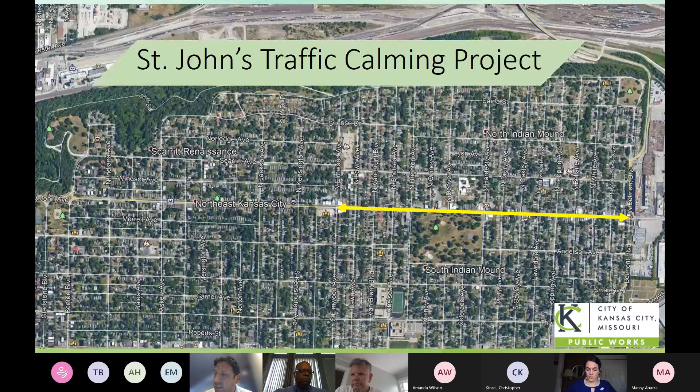With that behind us, and if there are any questions about the background of the project, I'm going to turn it over to Christopher Kinzel from HDR to begin to talk about the findings and recommendations of the project.

Very good. Can you hear me? Yes, give me a thumbs up if you can hear. Okay, let's see. Maggie, do I need to talk about these slides, or am I just going to share my screen? Yeah, I'm going to stop screen sharing and kick it over to you. Okay, so I will pull this up and make sure you can see my screen, Maggie. You're my test—yes? Get in there. Yep, yes, yep, okay.

Just a brief transition from our last meeting to this one. At our last meeting, we presented ideas for treatments on this corridor, in line with the allocated budget. If we did specialized treatments at intersections, like speed tables or speed humps—higher cost treatments—we'd only be able to focus on a few locations throughout the corridor.

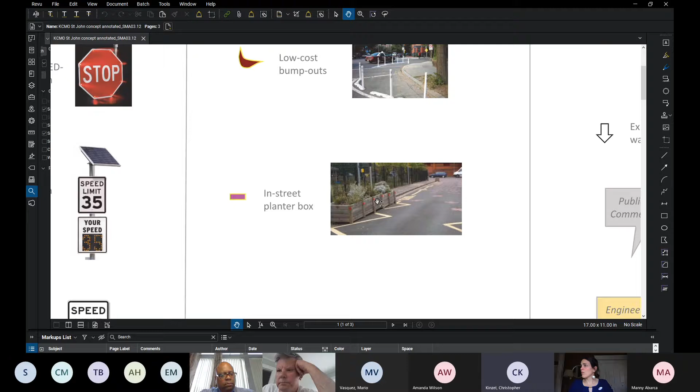There are a couple other places—pink isn't necessarily the color we've chosen—where we've shown some off-street vertical elements, like a planter in the street. In several places along the corridor, especially right in front of the park, there are already bump outs, but they're just curb bump outs without a vertical element. So we're suggesting adding vertical elements, such as small planter boxes, in those areas to reinforce those bump outs.

We're showing restriping of the whole corridor, and you'll see that in a second. That'll include high visibility crosswalks of the variety you're seeing here. And then there are a couple other features that I'll be pointing out.

One place where we're showing the LED-rimmed stop signs. There are some places with four-way stops and no flashing red lights or anything, so these are a cost-effective solution that will make those stops a little more visible. I'll show you where that is.

We're adding more speed limit signs throughout the corridor. And then also in a couple strategic spots along the corridor, we're recommending these solar powered signs that give you feedback on your speed. They flash if you're going above the speed limit. I'm sure people are generally familiar with those.

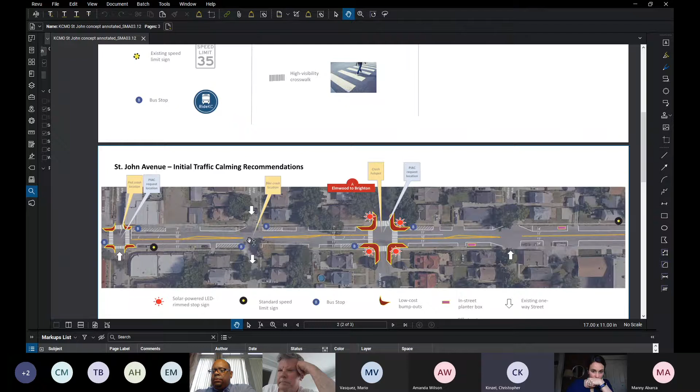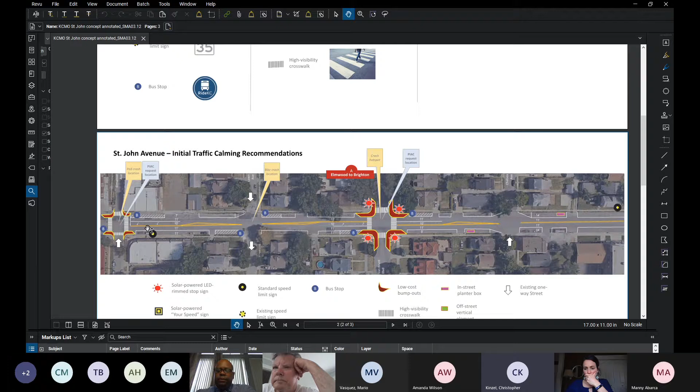I'm going to jump right in, and I'll zoom in on various spots so we can roll down the corridor. This section here is from Elmwood to Brighton. We're going to start at the west end of the corridor and move east, so that'll be left to right on your screen.

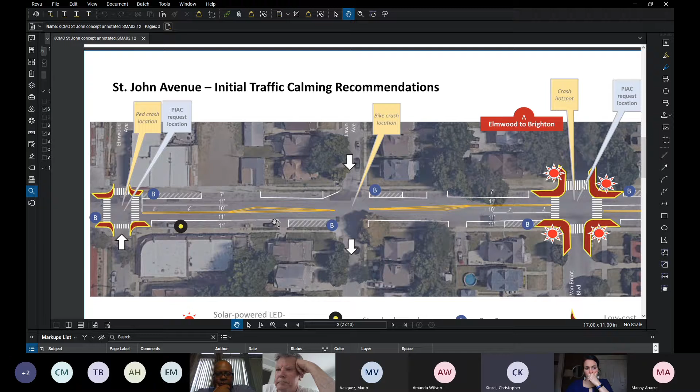These little arrows show where there's one-way streets. The blue Bs show where there are bus stops. Some of these dimensions show proposed widths of lanes, and you can see we've got proposed striping. And then we have these little balloons here that show some information, like this.

The intersection of Elmwood was the subject of the PIAC request, one of the intersections talked about in the request, so we're just highlighting the specific locations. Again, we've sort of expanded beyond that based on the feedback we got.

Then there's some other findings that we wanted to point out, like here at Elmwood, this is a pedestrian crash location. So again, we're showing bump outs on all 4 corners, a high visibility crosswalk. This is a signalized intersection, but this will also make the pedestrian crossing distances shorter, and again, when the light is green, it will help cut down on the speeding.

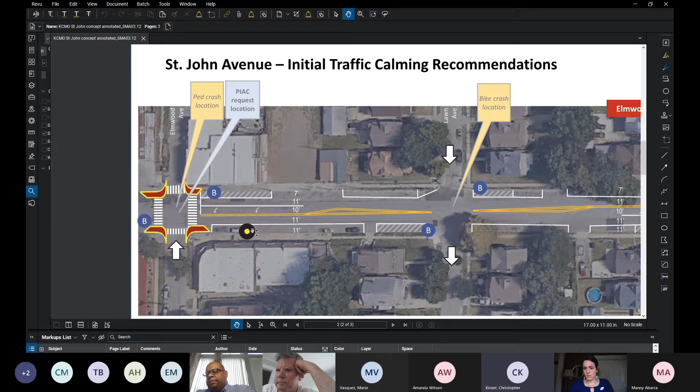We're also showing here a speed limit sign. You'll see here throughout, we're kind of reserving some bus pullout areas. And in general, we're narrowing the lanes of the street with striping, trying to narrow them down to 11 feet, which is really the narrowest we can get them, because KCATA runs buses down this corridor, and 11 feet is the narrowest that makes sense.

So what we've done is kept the through lanes at 11 feet, narrowed, which is narrower than what's out there today, narrowed the turn lanes to 10 feet, and then taken up the rest with parking that's striped out and delineated. In some of these parking zones, as I mentioned, there are planter boxes proposed and things, so that really we're trying to reinforce this narrower width of the road.

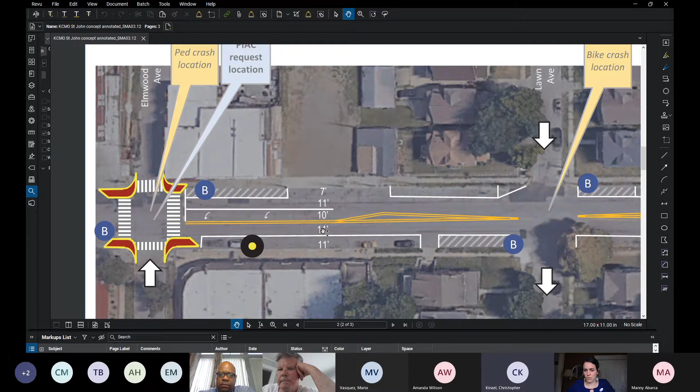You can see through here, the parking width kind of varies so that we can keep, because the street width varies, this helps us keep the paved width of delineated lanes straight, or narrow. But we're continuing to provide parking all along the street where it is today.

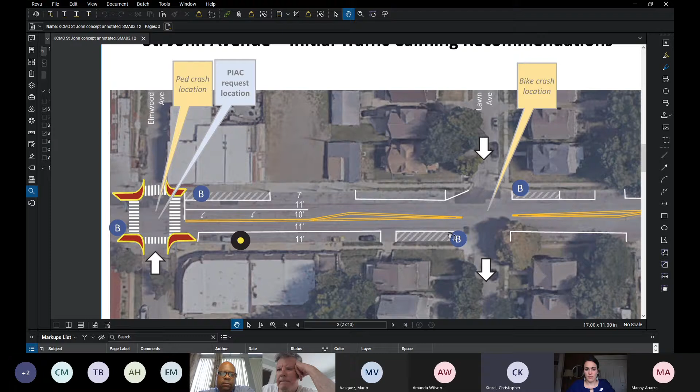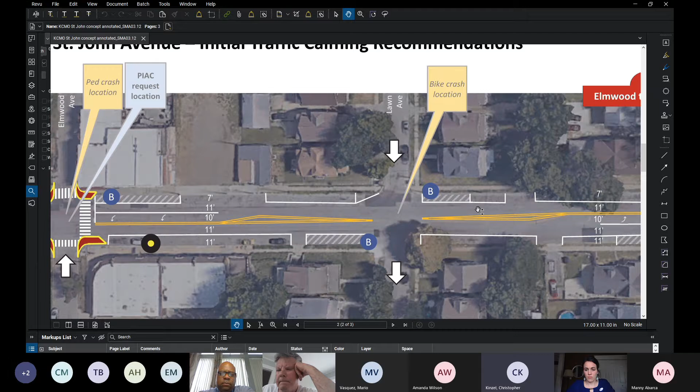In the bus zones, we're striping those out so that the buses can make their stops. We are coordinating with KCATA - they're going through their system right now, so we'll make sure that if they make any changes, we're reflecting those changes.

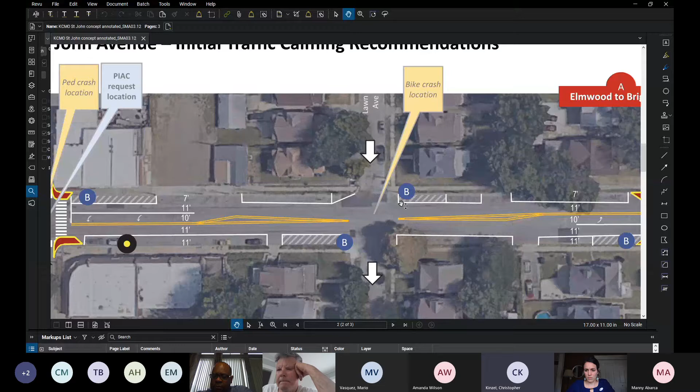Moving down to Lawn here, this was a bike crash location. So again, by keeping this narrow, we're promoting lower speeds. We'll also be better promoting bike travel if cyclists want to continue to use the street.

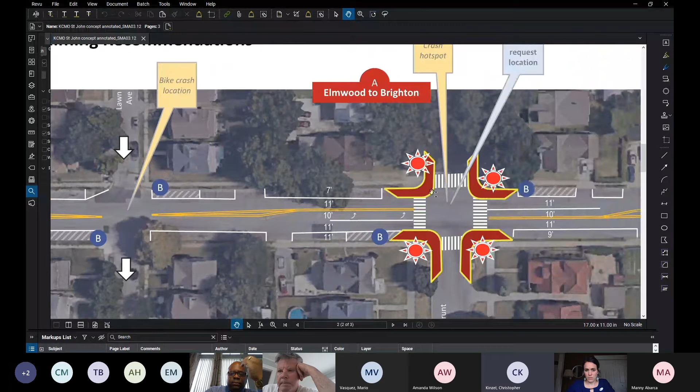And then moving down to Elmwood, we're showing the bump outs and the crosswalk - I'm sorry, this is Van Brunt, excuse me. Van Brunt is really the widest street, being a boulevard, it's the widest street along the corridor in terms of cross streets.

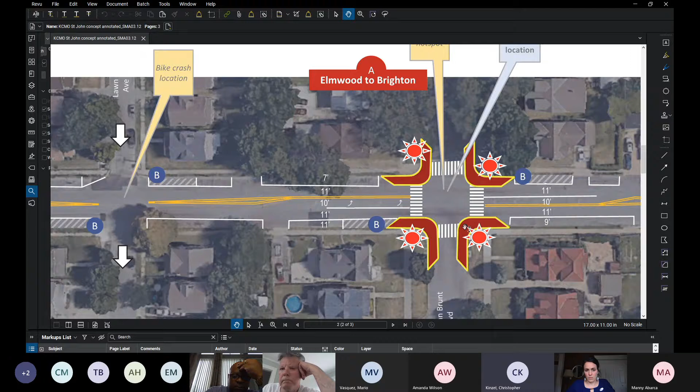So we need a little more, we'll be able to bump out a little bit more and really provide some narrowing benefits here. This is the four-way stop, and this is where we're showing those solar flashing stop signs. They're ringed around the edge with flashing red lights that are solar powered. This is a location where there have been more crashes along the corridor.

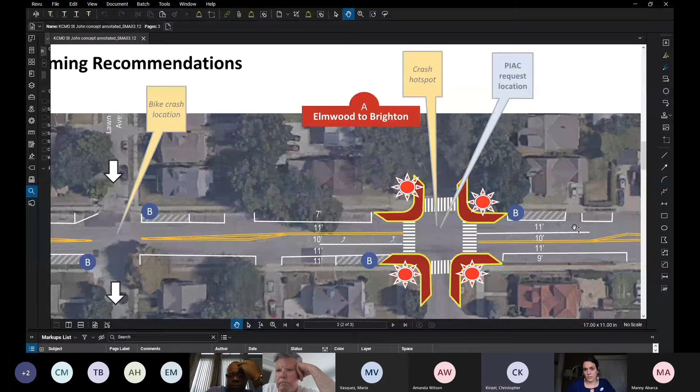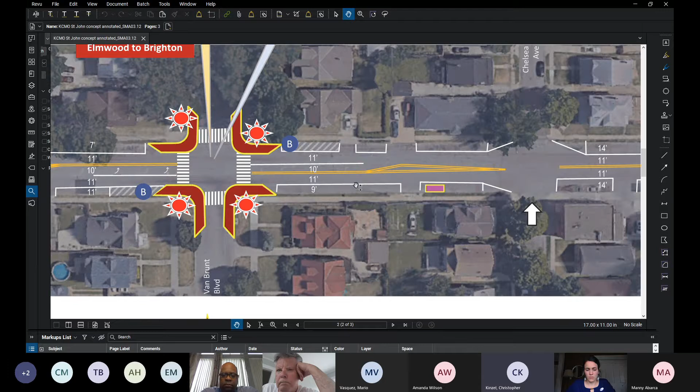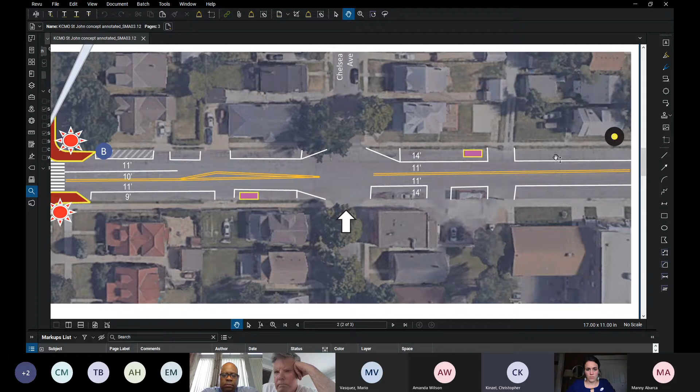And this is here, just as we get east of Van Brunt, our first location where we're showing a planter box, so we're trying to intersperse those between these bump outs. Here's one on the south side of the street, here's one on the north side of the street. That reinforces those parking areas and those narrower travel lanes. And then a speed limit sign here as we get to the end of this little tile.

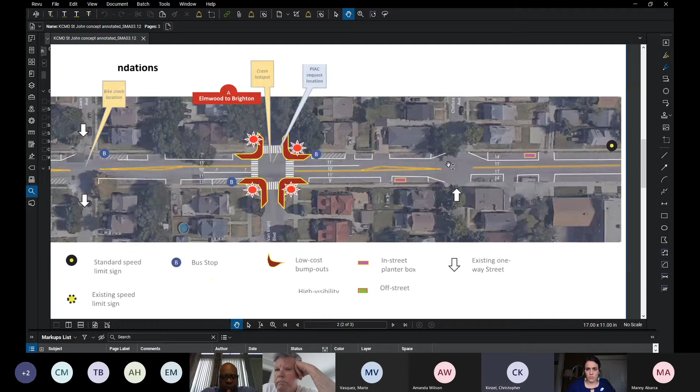So I'm going to walk through 3 more of these this way, but I guess, Maggie, did you want to see if there are any questions at this time? Yeah, so we've got a few general questions that I think we'll wait till the end to address, but it does look like we've got a couple specific questions about this section.

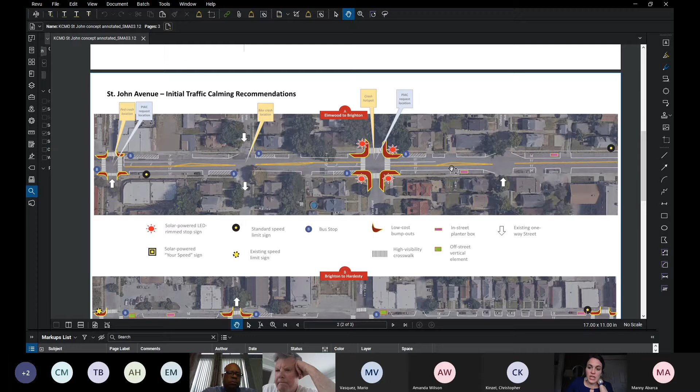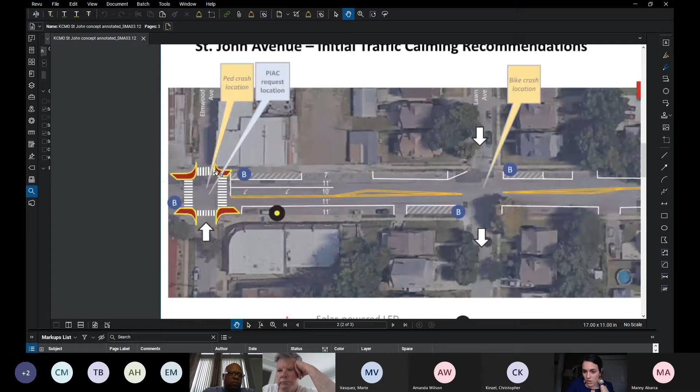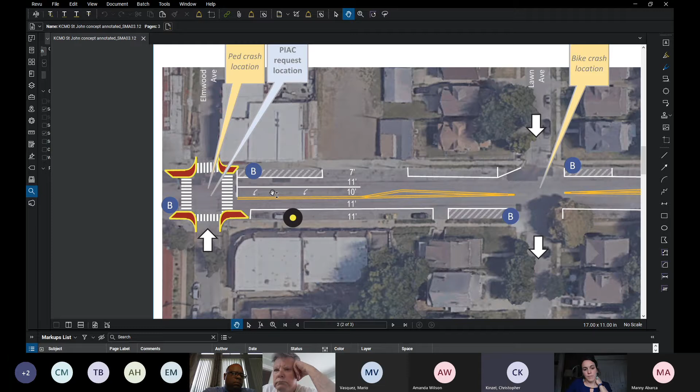So Amanda in the chat is asking about the intersection of St. John and Elmwood, wanting to make sure that the left turn arrow is pointing the right direction with the one-way on Elmwood. I think it might just be an error on the arrows here where we're showing the left turn lane into... Yes, you're correct. This concept needs a slight revision here because there should be no left turns onto Elmwood. You're correct.

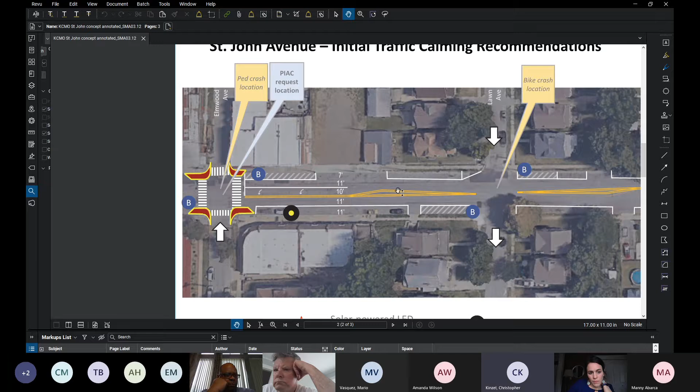So we'll make that correction. And then how would that change the configuration there of the lane? We would probably stripe out the center and just show it as a double yellow, so it would take up the same width.

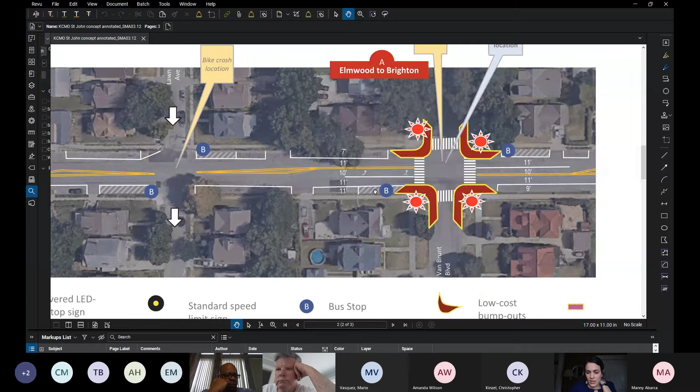And then on the other end of this tile back at Van Brunt, Amanda wants to confirm how many actual lanes are at Van Brunt. On Van Brunt, there will be 1 lane in each direction, like there is today, and it kind of narrows down, but we're necking it down there. And then on St. John, there will be 1 through lane in each direction, and then a left turn lane, like there is today.

It does look like someone has their hand raised for this section, I believe it's Scott. If you do have a question about this particular section before we move on, feel free to raise your hand or type your question in the chat. Again, all general questions, we'll have plenty of time for additional questions when we get to the end, but if you had something specific to this particular section, we can address that now.

So Scott, if you'd like to unmute yourself. Yeah, thanks, and I apologize, I'm on my phone and I can't access the chat. The question is on Van Brunt: since that is a boulevard, has the team talked to the Parks Department related to the treatment there, just to be sure that they're aware and have either blessed it or made some commentary toward it?

Thanks. Hi Scott, this is Mario. Yes, we have shared these concepts with the Parks Department staff, and as of right now we haven't received an approval, but they are aware of the items that are being proposed. We'll expect to continue to have discussions with them as we try to advance the project forward. Okay, well, I have Park Board Tuesday, so I'm happy to relay the message. Okay, that sounds great, thank you.

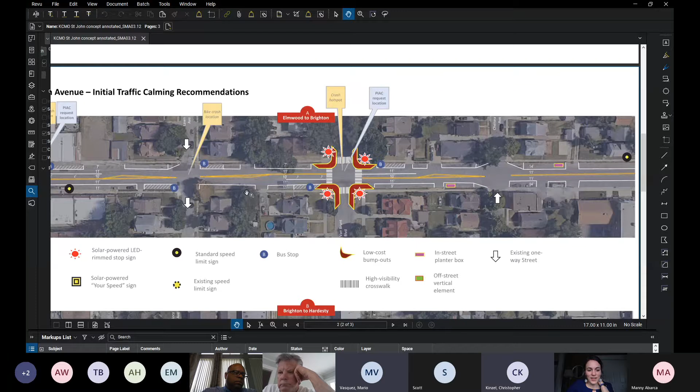Are there any other questions or thoughts about this initial section from Elmwood to Brighton?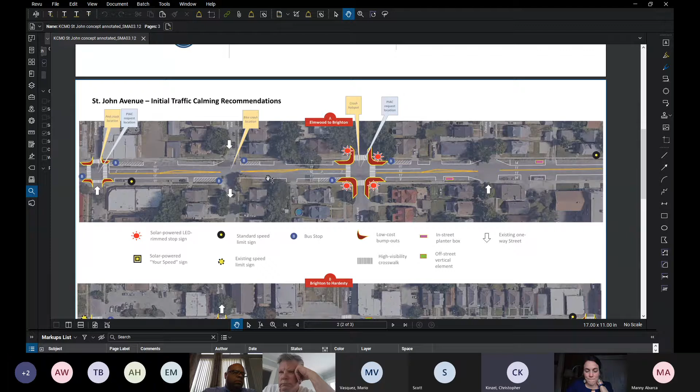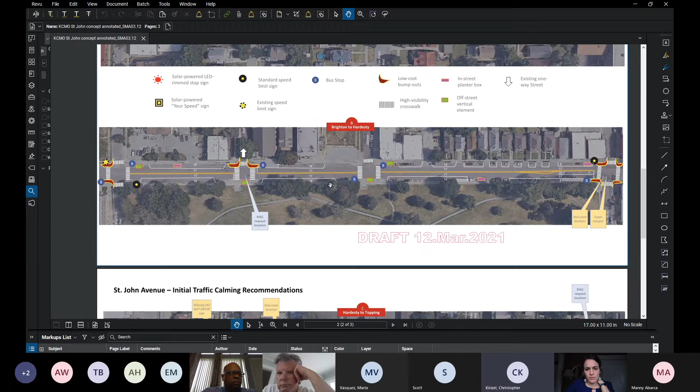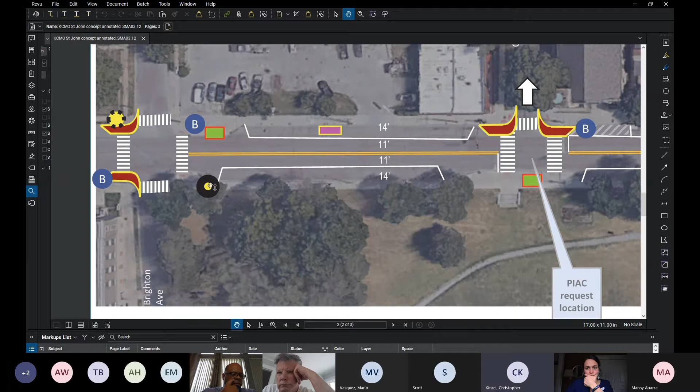So this is in front of the park, as you can see. If I zoom in on Brighton, this is a symbol for an existing speed limit sign that's out there. We're also showing a new speed limit sign in the other direction. Again, we're showing speed limits every quarter mile or so to keep people remembering these things.

You'll see through the park here, these green boxes are where we would put on the existing bump outs to help give them a little bit more verticality. We're showing a few of those here. Obviously, we have to be careful in the design to make sure we're not obscuring sight distance around the corners and things like that. But having something on those bump outs gives the driver a little bit more of what we call an optical narrowing feeling, which just makes the road feel narrower.

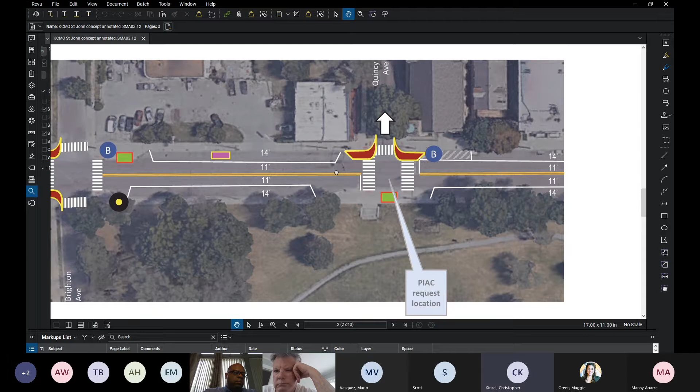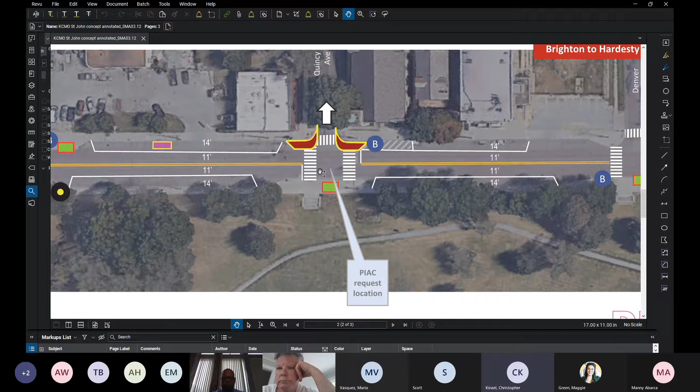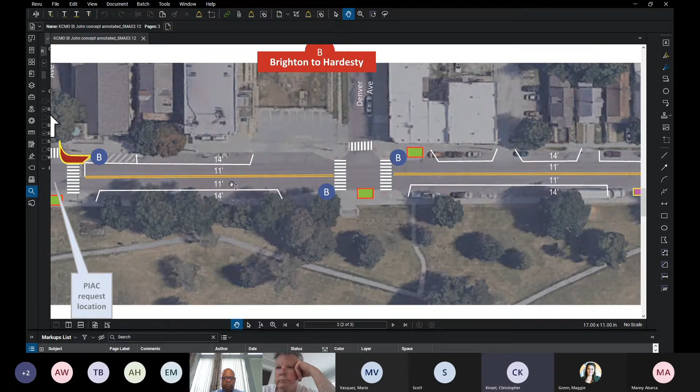We also have a planter box here strategically in the parking area. At Quincy, we are showing bump outs on the two corners. There's already a bump out on the south side, it's a T intersection, but then also a vertical element there to continue reinforcing that optical narrowing. Sorry to use a geeky term. We're doing the same thing down at Denver, keeping these 11-foot lanes, varying the parking width as needed to keep the lanes narrow.

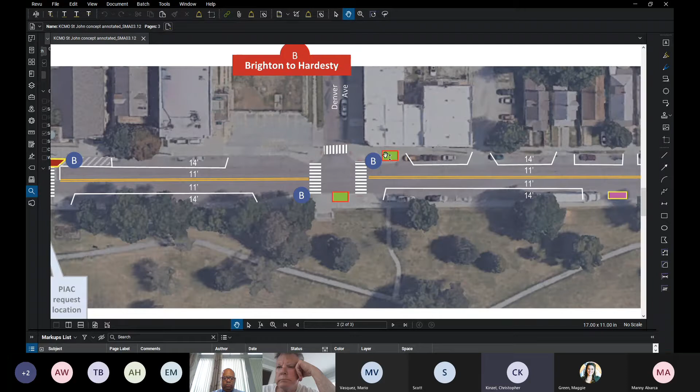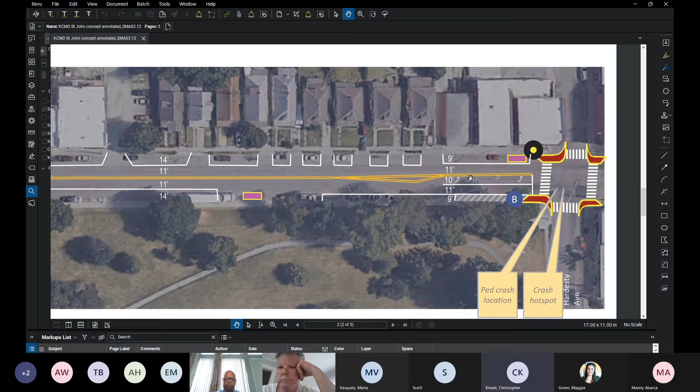Crosswalk at Denver, some of these vertical elements on the existing bump outs. As we move further down from Denver, we're showing a planter box on each side, trying to strategically locate them so they're not blocking key high demand parking areas. And then we get to Hardesty, which is an area that people have been really concerned about.

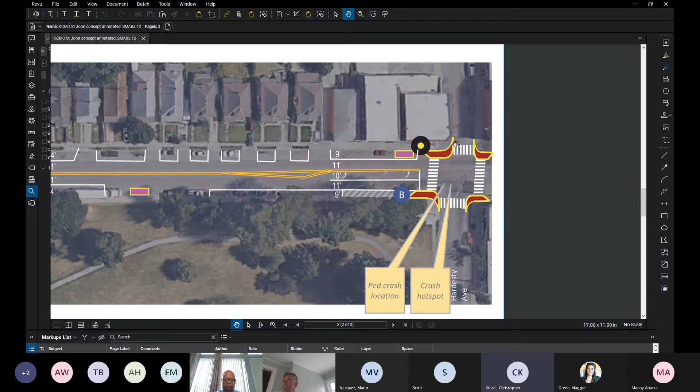It's sort of the top of the hill, especially heading eastbound, you start to go down the hill. So on the next tile, you'll see we've done a special treatment to continue discouraging people from speeding down the hill. We're showing a speed limit sign for the eastbound direction, a planter box right near the intersection, and then bump outs and high visibility crosswalks there at Hardesty. As we head down the hill, there are some additional treatments, but that's on the next tile.

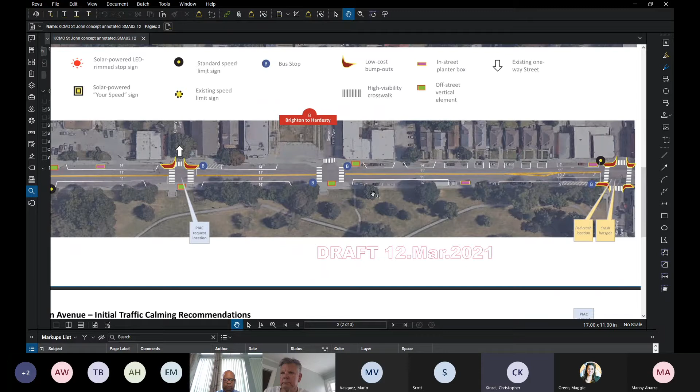I think specific to this section, Abby Hoover is asking about if the crosswalks are going to be raised, or will there be any signs or flashing lights for them by Holy Cross?

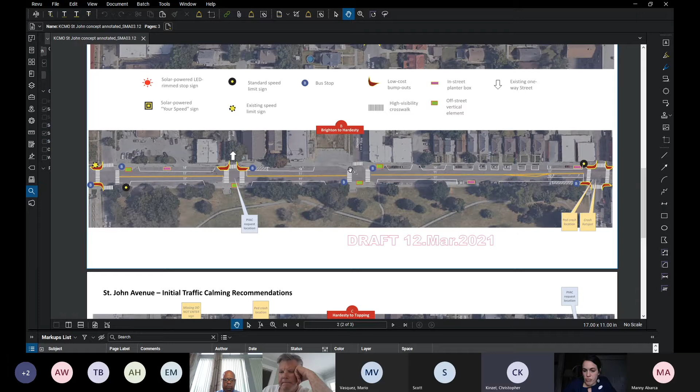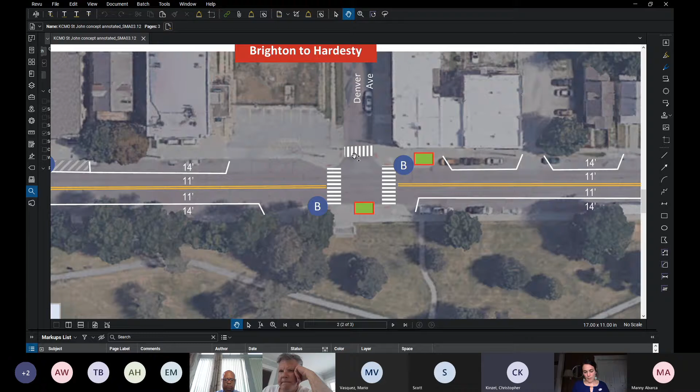At the moment, our plan is not to raise them, that's how we're spreading the treatments out. We're not showing raised crosswalks here because of the expense in these locations, but they will be high visibility painted crosswalks. No additional flashing lights are proposed at this time.

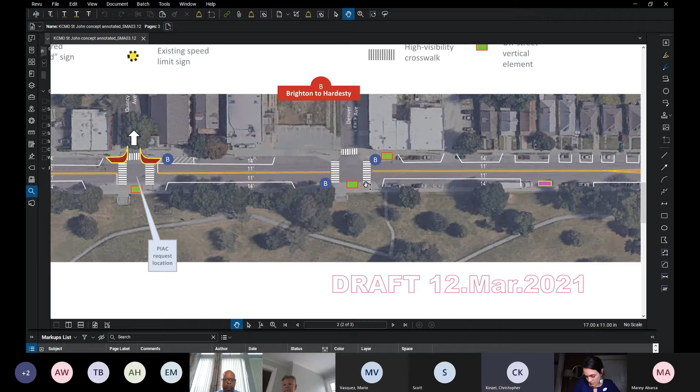Well, just to clarify that a little bit, this is Mario Vasquez speaking. When we're talking about flashing lights, we're thinking that we're not going to provide things like an overhead or mast arm type signalization, but each crosswalk will be appropriately marked per MUTCD guidelines. So there will be signage to indicate the crosswalk, but not any of what we call hawk signals, the ones that flash in the middle of the intersection. Those are rather pricey, so we don't think those will be necessary, but we'll for sure have the appropriate signage for the intersections.

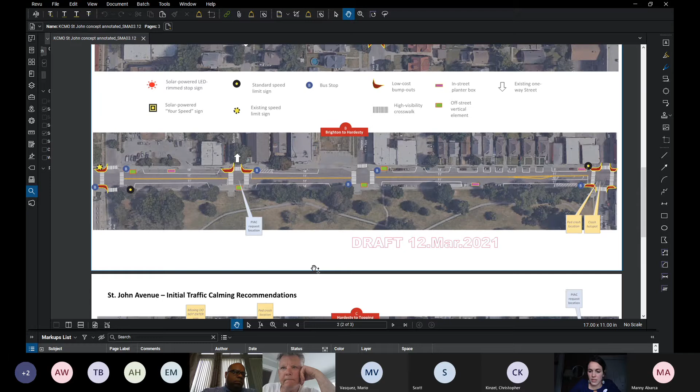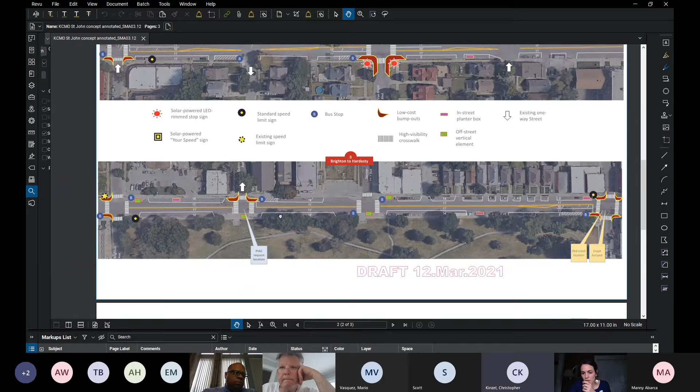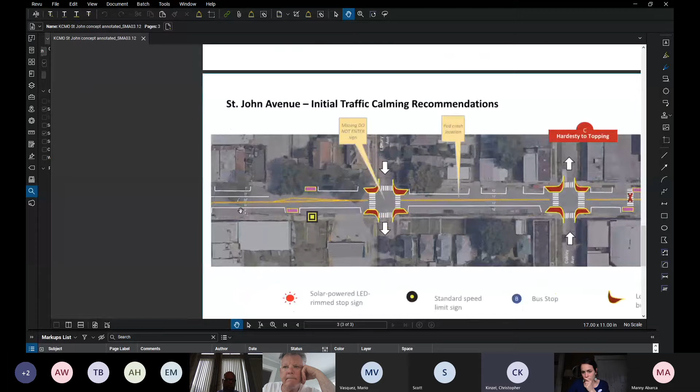Okay, so as we continue down, this section is from Hardesty to Topping. As we head down the hill from Hardesty, as things start to pick up, we're showing one of the flashing your speed signs to not only give people the speed limit, but to flash back at them what speed they're traveling at, which is a pretty effective method for getting people to slow down. We've also got planter boxes here to narrow the street again down to those 11-foot lanes, and on the sides of the streets to reinforce those narrower lanes.

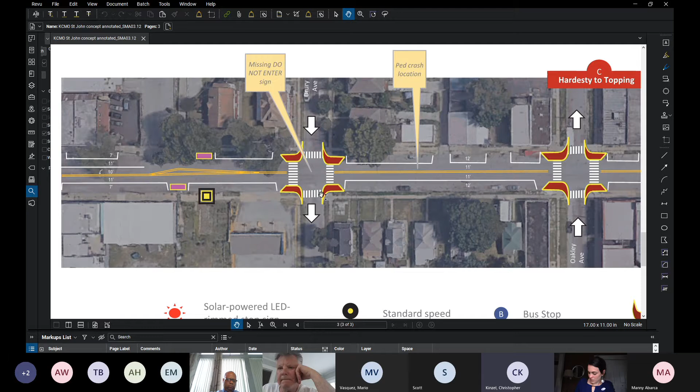As we get to Drury, we're showing again the bump outs to narrow the street, and then the crosswalks, as Mario mentioned, with appropriate signing. Then the same thing as we get down to Oakley. Now there is an existing crossing on Oakley in front of the church.

Our proposal here is to really keep this section slow. We've now got bump outs at two adjacent intersections, and our proposal would be that people would cross the corner here, so instead of having a mid-block crossing, we have an intersection crossing. This is in front of the church area, and on the other side we're providing planter boxes to continue to narrow the street.

As we go down past Lawndale, we've got another planter box, and then when we get to Topping, we're showing bump outs there, and also crosswalks and a speed limit sign.

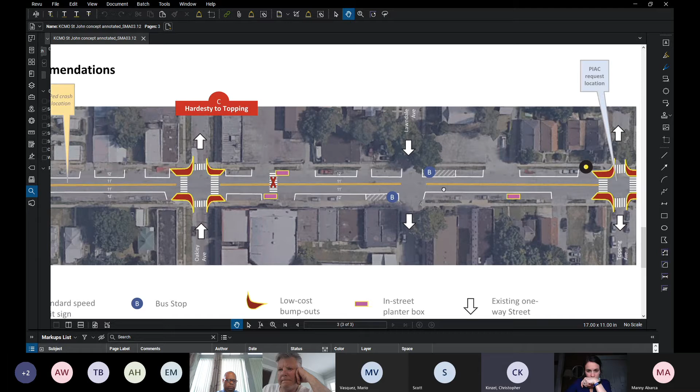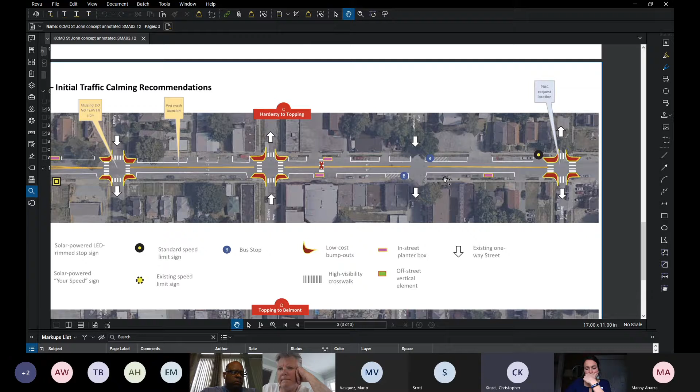I think the other electronic speed limit sign will be on the last section, where it's a little bit flatter. Here, going east, you're going downhill from Hardesty. Going west, it's uphill, so we've tried to position that speed limit sign on a flatter spot where it might control speeds a little bit better in the westbound direction. So that is the third section.

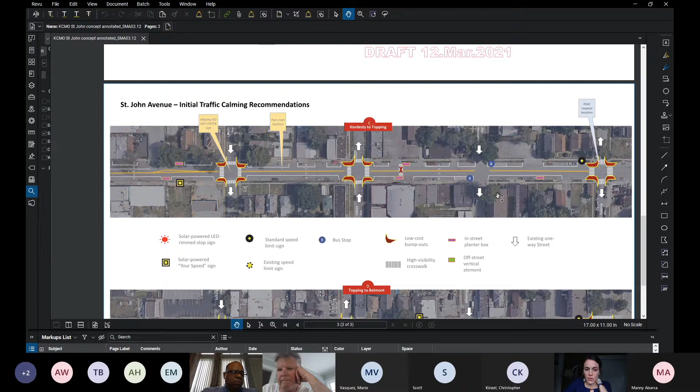Maggie, any questions on this one? I am acknowledging several that are coming in that are a little more general, so I am going to try to wait for those till the end. Anything specific about this section that Christopher just covered, or any additional clarification needed? Scott, I see your hand raised.

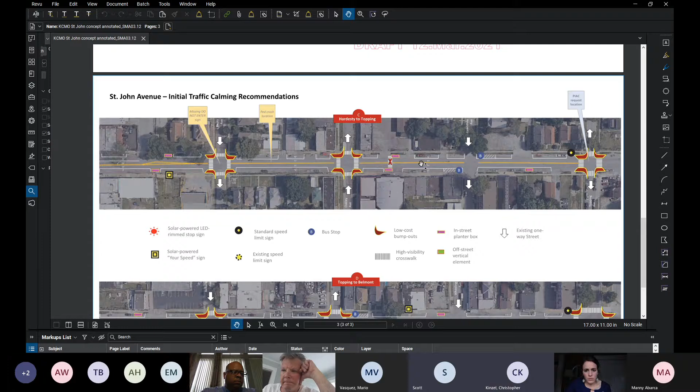Go ahead. That mid-block crosswalk is for Calvary Church. Yes, and that is primarily because across the street is also their parking lot and a couple of their buildings.

So I raise that just to ask if there has been that conversation with Pastor Wendell over there. I think he's on the distribution list for all of this, but I just want to raise that's why it's there, and that a conversation with the church is probably warranted to deal with that issue. I'll mute myself. Thanks.

Maggie or Mario can respond. I'm not aware of conversations with the pastor, but maybe Maggie or Mario are. Yeah, I think that's a great point, and something we can definitely reach out about before we propose that change, because I think they probably utilize that crossing more often and frequently than the actual intersection. So definitely wrote that down to do a follow-up directly with them.

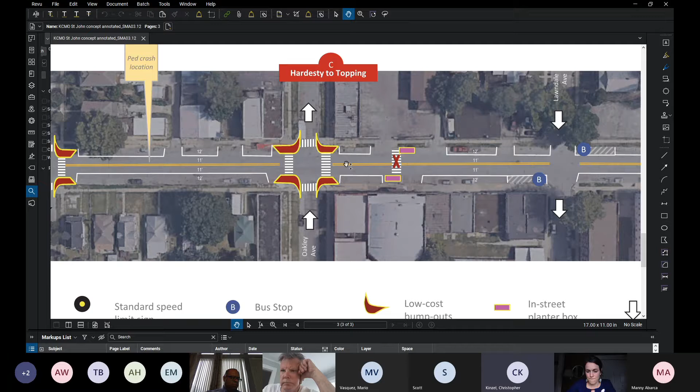Thanks. I think the hope was, and we could certainly have that follow-up, we're looking at this because it's a little bit out of the way for a pedestrian to make that crossing, but not hugely out of the way. So we were hoping that consolidating at the intersection helps make the intersection safer and gives them a safer place to cross where they might be more expected. But it's certainly a conversation worth having.

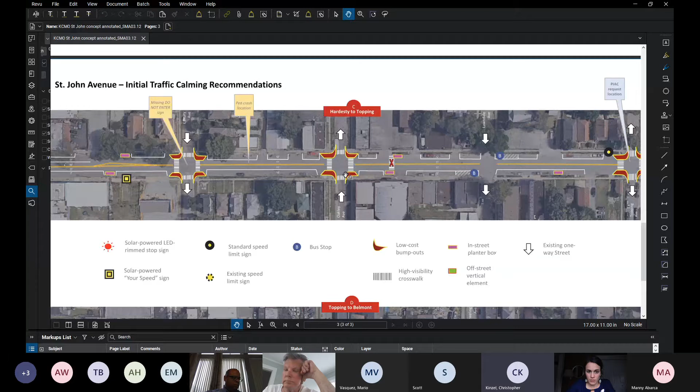So, Maggie, any other comments on this section? Not so far. So let's do the last section and then circle back to more general questions. There was a question about the speed limit. I'm not sure if the speed limit will change by the school, or if it'll remain the same. At this time, we're not proposing any changes to speed limits, but the speed limit at the school should still be 25 miles an hour.

What we intend to do is a post-installation evaluation to make sure these treatments are being effective. Our goal is really to bring the observed speeds to roughly around 30 miles an hour, so that's an appropriate speed limit. Thanks, Mario.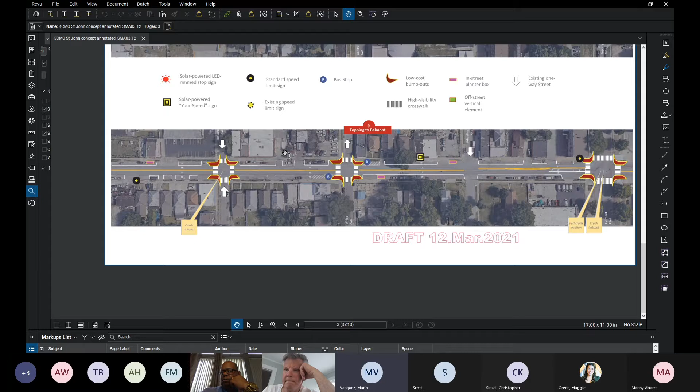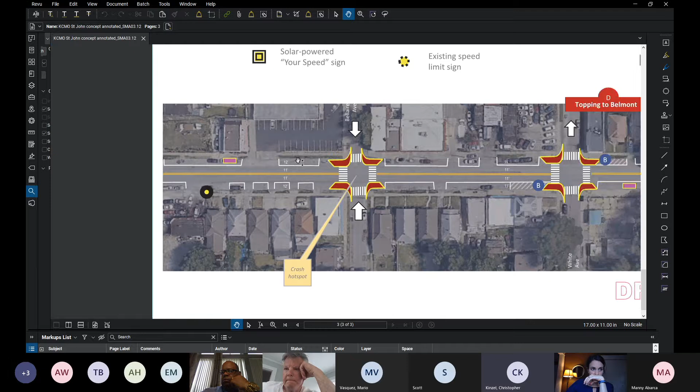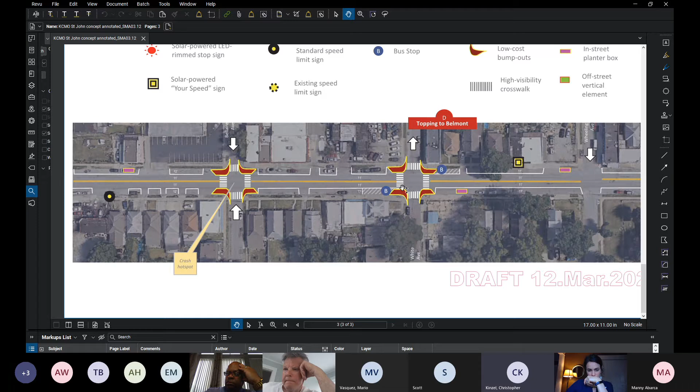So this last section is Topping to Belmont. At the beginning of the section, eastbound, we've got a speed limit sign. Westbound, we've got a planter box carrying the theme through here. And then at Bellaire, we're showing bulb outs, and also at White. It's a question of trying to figure out where you can put these things and where they'll work, and how you can balance them with the planter boxes.

So in this case they end up close to each other, which is not necessarily a bad thing. We have two narrowed intersections, White and Bellaire, which are also narrowed. And then as you get past White, this is where we have in the westbound direction the flashing speed sign.

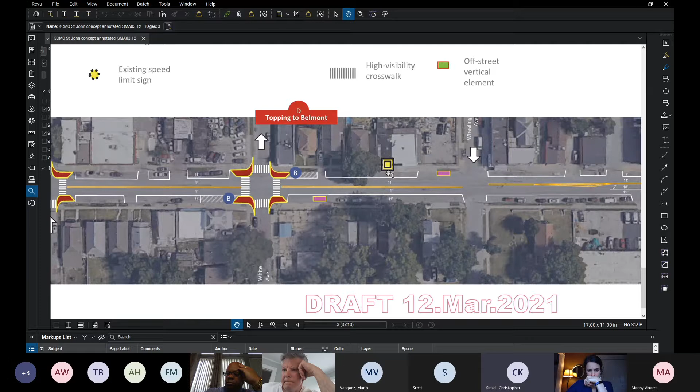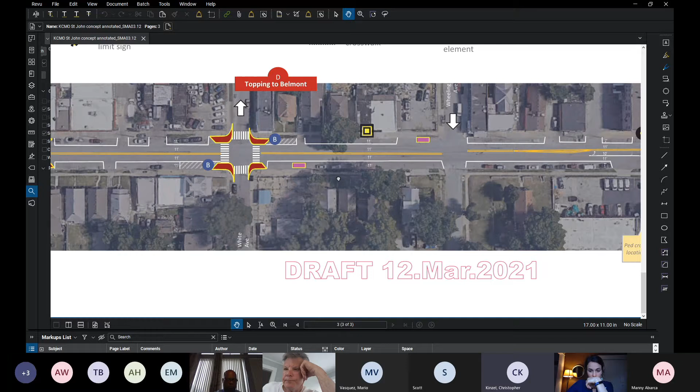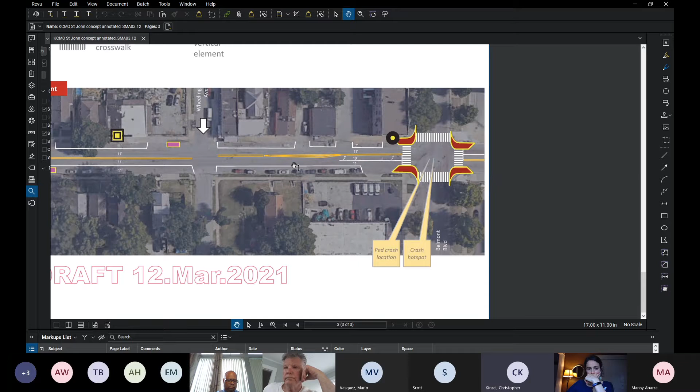So it's kind of as you're entering the area that you see this flashing speed sign. And then we have some more planter boxes between White and Wheeling, and then from Wheeling to Belmont. At Belmont, we have the bulb outs and crosswalks, and then a speed limit sign at the beginning of this section to again reinforce to folks the speeds through this area.

So as you can see, it's a fairly consistent pattern of bulb outs, narrowing, striping, and planter boxes to really narrow the street, give folks the perception of a narrow street.

This is something that cities across the country are using, these kind of low-cost treatments that can really be spread across a corridor. And Mario can attest the city's been using this as well, and it is a really good way to spread dollars and provide those benefits.

So, any questions, Maggie, on this last section?

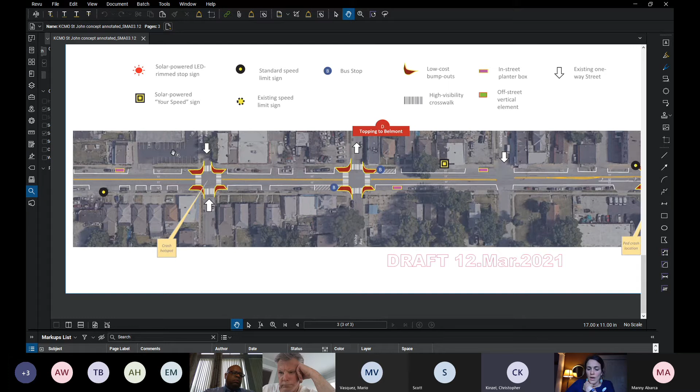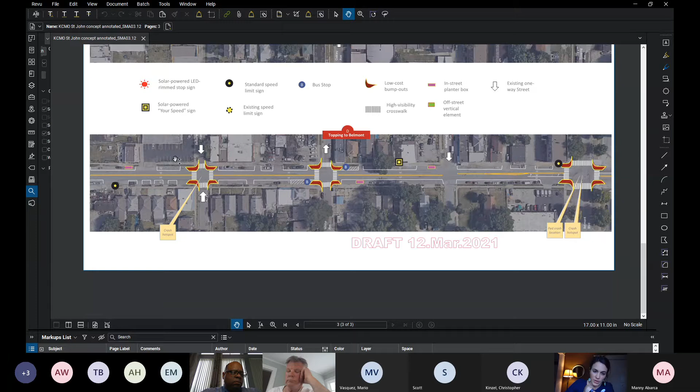One question that came through: what about planter boxes directly in front of some of the businesses, like the ice cream shop and taco places? So, Christopher, I don't know if there's a direct translation in outreach and where the planter boxes are placed along the corridor, or what criteria you use to decide where they go along the corridor.

Yeah, that's a great question, and keep in mind this is a concept for folks listening, so when we get into design, the actual locations could shift a little bit. We were pretty strategic, and the first criteria in placing the planter box was, if there's a parking lot right next to it, so on-street parking may not be as much at a premium.

Or typically we tried to place it at locations where either there's already a lot of parking available along that section of street, so having the planter boxes there would not be an issue.

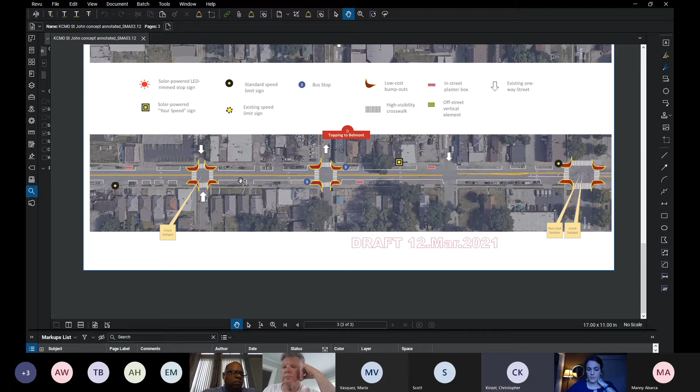Those are really the two big things: where there's adjacent off-street parking, or where there's a lot of on-street parking, so that we're not taking away, as a percentage, a large piece of the parking. We did look pretty carefully at those locations and tried to be strategic about it.

But that's why we're having this conversation as well. We certainly welcome folks' input and feedback on this.

I do want to reiterate for everybody that at our first public meeting in December, we did hear loud and clear from folks at that meeting and some subsequent meetings the emphasis on spreading out the funding more corridor-wide, instead of doing less treatments or improvements at fewer locations.

So we did work with the design team, and thanks to HDR for running with that concept, so that we can make sure we're using the funding as far and at as many locations as possible. I just wanted to reemphasize that the feedback was very helpful at the last meeting in informing the direction we headed here.

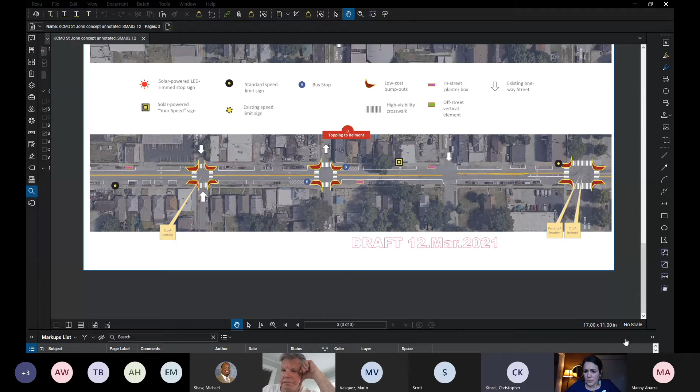So with that, I don't know, Mario, do you have any high level thoughts before we dive into some of the questions? Yeah, I think the key thing is, again...

There's a couple of questions about the cost of the project and what it takes. In reality, $500,000 over 1 mile sounds like a lot, but it doesn't go too far.

So I think what we have tried to do here is come up with ideas that can be implemented throughout, so that, as Chris mentioned earlier in the meeting, the benefit can be felt throughout, so that we can see an improvement to traffic safety along the corridor.

I think we definitely want to continue to work with the neighborhood to come up with a way to implement improvements long term. And this goes back to some of the questions about coordinating with resurfacing, and at what point these cease to be low-cost treatments and become more permanent treatments.

That's part of the discussion that we need to have with the neighborhood long term. But I think our initial run at this is to implement something that can be low cost and implemented throughout the neighborhood. Trying to think what other thoughts are out there. So I guess that's kind of summarizing what Chris has shown to you today.

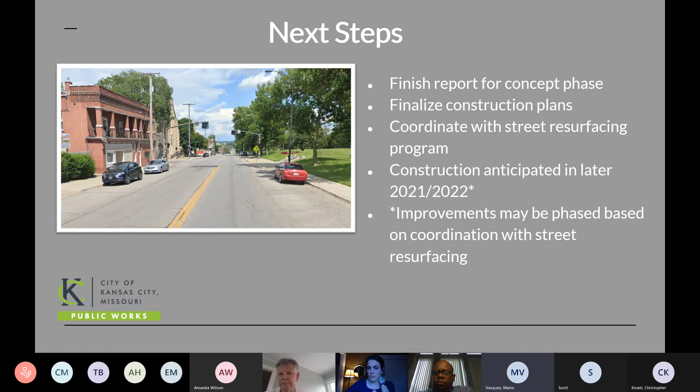And last but not least, there's some things that we may hold back a little bit before we're fully implementing. For example, Chris, do you mind sharing your maps real quick? I want to make a distinction between the types of pavement markings. Sure, hold on. Let me get back to that.

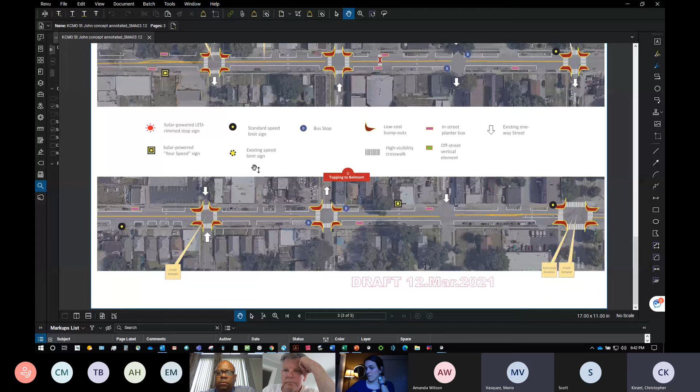Yes, just zoom in on any of the panels and that'll be okay. So if you can appreciate in this panel, you can see some markings that are long and linear. Those long markings are probably the double yellow, for example. Those are ones that I would maybe hold off on, because those are better done with better asphalt or a newer, better surface. But the crosswalks, what I would call the short markings, those would probably be the ones I would want to implement immediately, because I think those are the ones we really need to improve the project and improve the corridor. So when we talk about long-term versus short-term improvements, I think that's what we mean. We'll do the short markings immediately, but maybe hold off on the long markings.

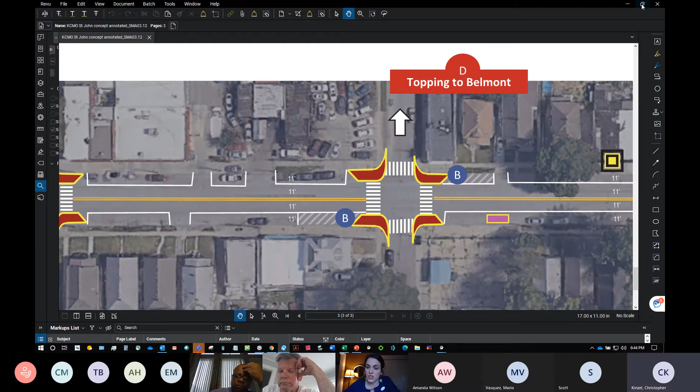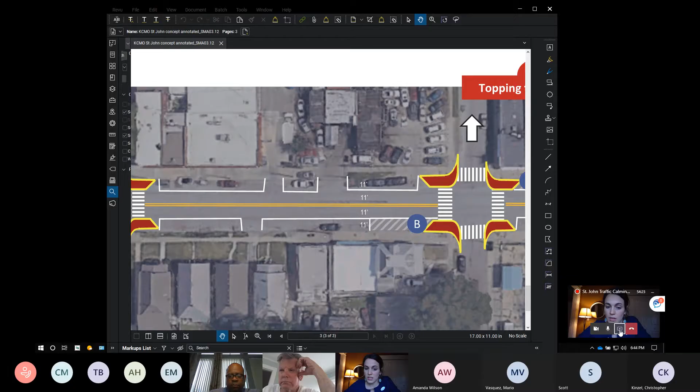So starting with Christopher Morales, he asked about the 3D painting. And by that, I think you might be talking about the artistic design and painting the pavement and some of the bump out areas. I can speak a little bit to that, and I'll let Mario verify. I do not believe that it's in the scope of the project to actually do painting within those bump out areas for this particular project.

However, we are still finalizing and getting very close to being finished with our Paint the Pavement policy. That will be a very good complement for the neighborhood or area businesses or schools to utilize that program and do artistic designs in the space created through these bump outs. Mario, I don't know if you have anything else to add, or Director Shaw.

In regards to using the Paint the Pavement program in coordination with this project, well, I think maybe one thing we haven't shared, Christopher, share with us what you think the preliminary cost estimate would be to implement everything as presented.

We're looking at just shy of $400,000 for the actual construction costs, not including engineering costs. As far as Paint the Pavement type integration, there isn't a lot of room, but there is some room to work with neighborhood groups to do specialized treatments at certain intersections incorporating artwork or school projects, possibly through a cooperative agreement with an entity that sponsors arts located in the area, or some other entity.